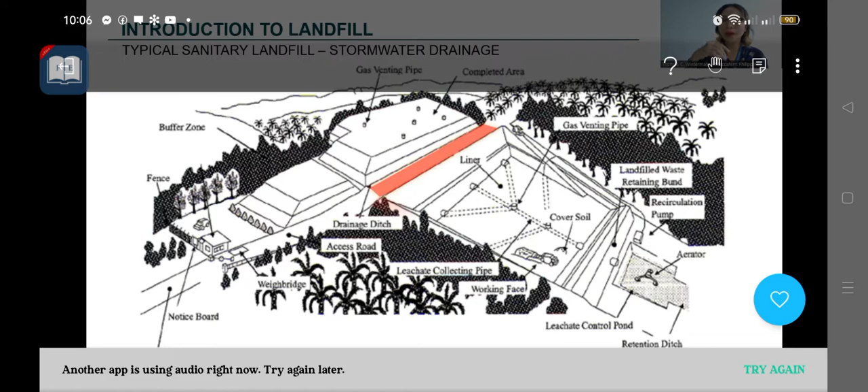Next is the liner facility. Since our waste produces leachate—water extracted from the waste—we don't want that leachate to penetrate our natural soil, because we don't want the natural soil to be contaminated.

That is why one of the most important areas of construction in a sanitary landfill is the liner facility. A liner facility is an impermeable layer in the sanitary landfill that impedes the flow of leachate, so basically your natural soil is protected.

Next is the leachate facility. If you don't want leachate passing through your natural soil, you need an avenue for it to flow through. That is why we have a leachate facility, or pipes, where the leachate will flow. Next is the gas vents.

Gas vents allow the collection of methane gases. We know that waste produces methane gas, and once it is not collected properly, it is inflammable and can cause fire risk. So we have a gas vents facility for proper collection of those methane gases.

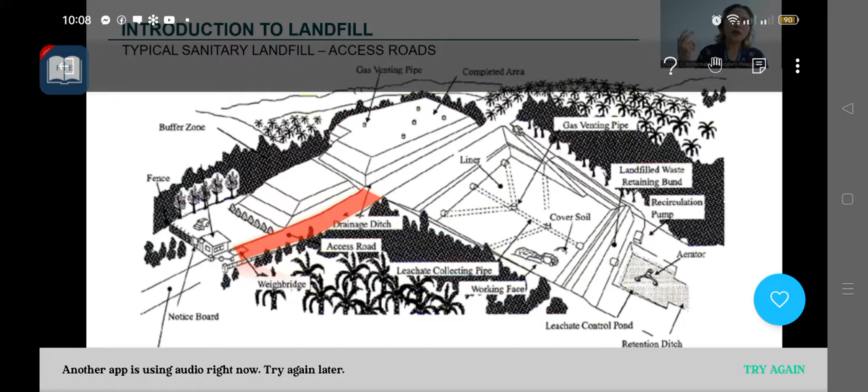Next is access roads. Since our sanitary landfill is usually constructed in an isolated area, there is a tendency that there's no existing access in that area. That is why one consideration in constructing a sanitary landfill is a proper access road, because it is where garbage trucks or dump trucks will pass through.

The last area of construction I will discuss here is the landfill cover. So what is a landfill cover? At the end of every operating day—this is on the operation side of the sanitary landfill—the previous areas of construction were more on the construction side, but this one is for the operation side.

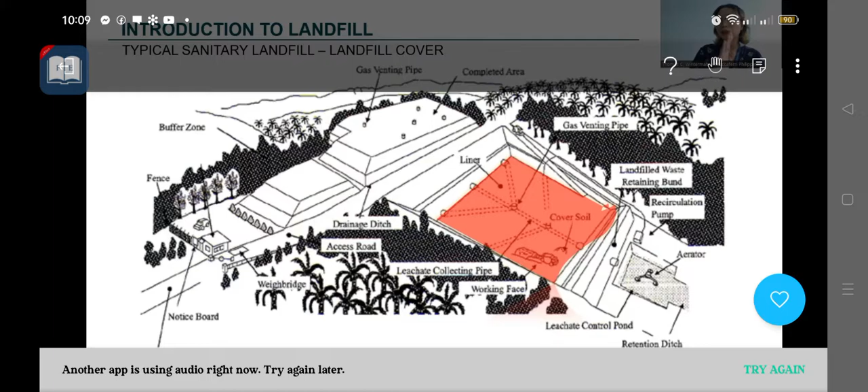Once we have ended the operation of a landfill on a day, it is recommended to put a landfill cover or soil cover for the prevention of odor, to allow animal control, odor control, and erosion control. This is part of the operations in which every end of an operating day, you need to put a soil cover with a minimum thickness, which I will elaborate on later.

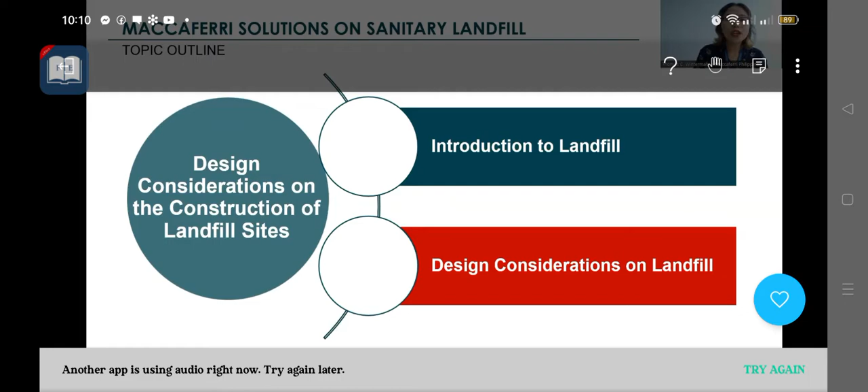Right now I will be discussing the different design considerations on landfill. I have provided a brief introduction on the different areas of construction of sanitary landfill. Now I'd like to dig deeper into these design considerations, and at the same time, what technology can we use or innovate for a faster, more efficient, and cheaper construction. These are the slope, the stormwater drainage, the liner facility, the leachate facility, the gas vents, access roads, and landfill cover.

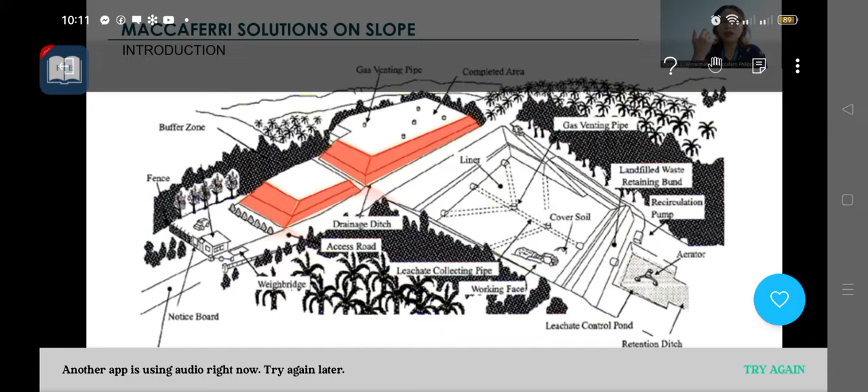Let me start with the technologies or innovations we could incorporate in the sloping area of our sanitary landfill. Our sanitary landfill is always constructed in a sloping condition because if constructed vertically, there is instability of the soil. Typically we need a factor of safety of greater than 1.2 for us to say the slope in our sanitary landfill is safe.

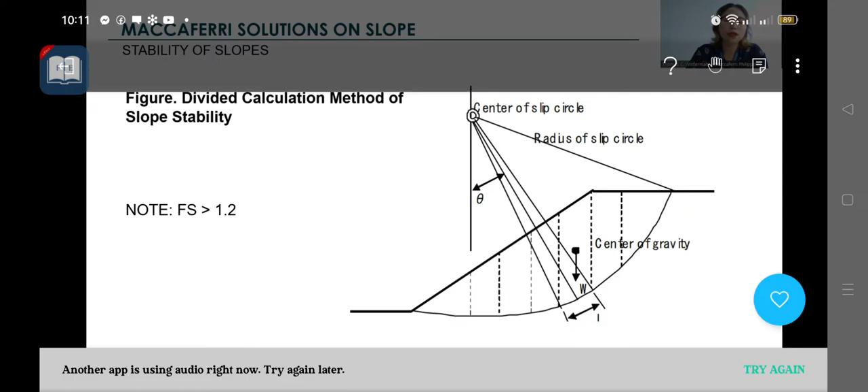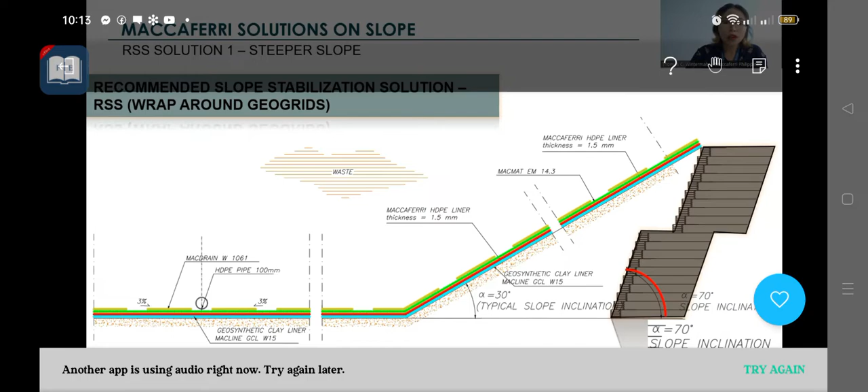So what's in it for us if we construct our sanitary landfill with a steeper slope? I have provided a quick calculation. Imagine constructing a sanitary landfill at a 10-meter depth. I have put here a side-by-side comparison of a landfill constructed at a 30-degree angle and one constructed using a reinforced soil slope with a maximum angle of 70 degrees.

So if we have a 100 linear meter on all sides of the sanitary landfill, we will have an additional volume of 24,400 cubic meters of waste. This means we will be extending the lifespan of our sanitary landfill. For example, if it is constructed to have a lifespan of 1 year, because you have constructed it at a steeper slope, your sanitary landfill will continue to operate up until 1 year and 10 months.

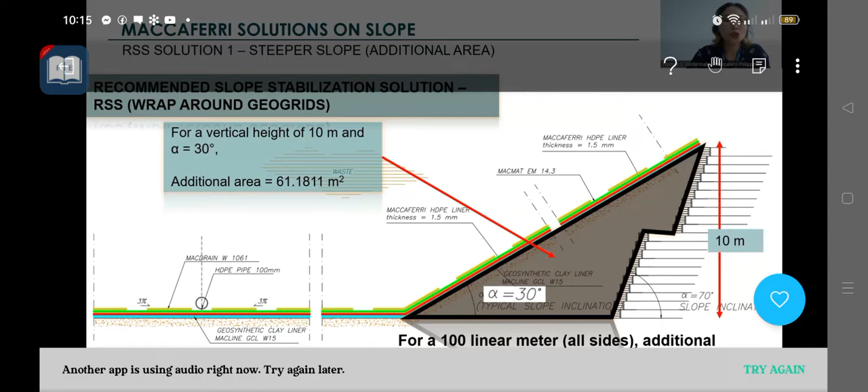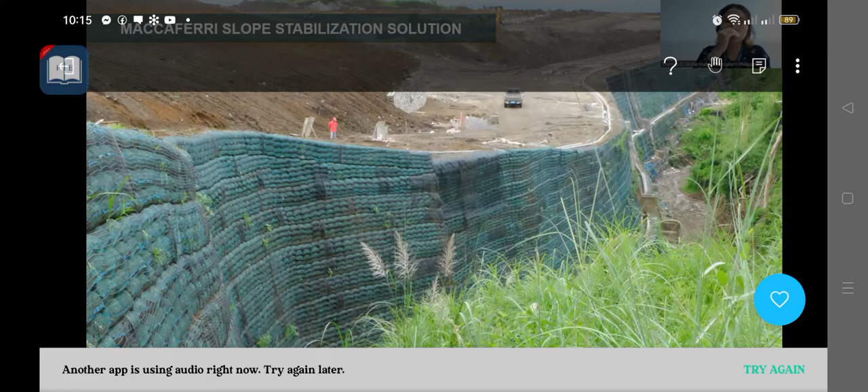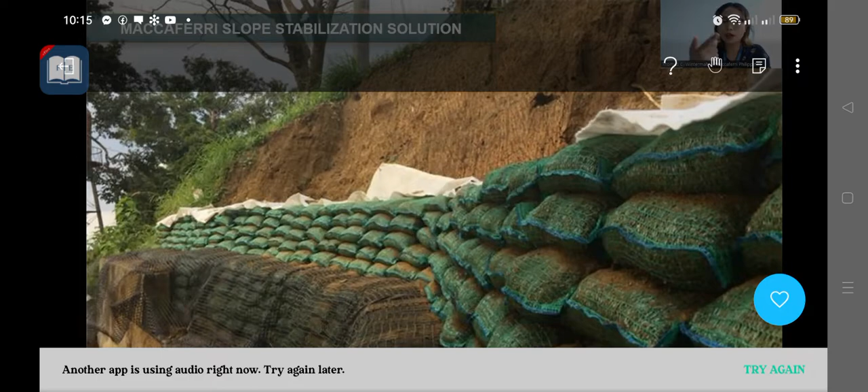Actually, this is how a reinforced soil slope looks like. But take note that this is not a reinforced soil slope in a sanitary landfill. I just would like to show you how a reinforced soil slope looks like. This is from a soil bag filled with soil, and then the geogrids will be wrapped around this soil slope.

This is a close-up look of a reinforced soil slope. Other than being able to be constructed in a steeper angle, another advantage of using reinforced soil slope as a means to construct our sanitary landfill is on the expansion of our sanitary landfill.

What do I mean by that? Because there are times when we're already finished with the first landfill, so we have already filled it. What happens is that we will cover it with soil so that it will be a flat area, and then we will find another area for us to construct our sanitary landfill. So this area is already finished, already full, and then I will go to another area to construct my second sanitary landfill.

One of the advantages of using this reinforced soil slope as a means of construction of your sanitary landfill is that instead of finding another area, you can utilize the space that you had on your previous sanitary landfill and just construct your sanitary landfill vertically. If we already have a finished area here, you can just construct your sanitary landfill vertically by using a reinforced soil embankment.

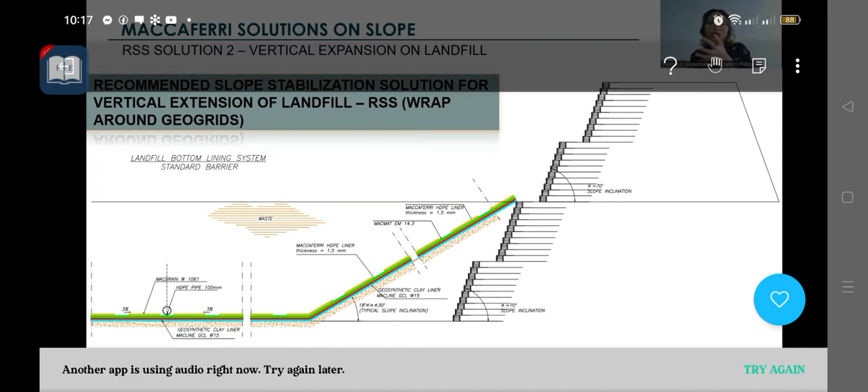Now, for reinforced soil embankment, you just need to construct it on the perimeter of the existing landfill, and then you already have your second landfill. Again, it will allow you to save space, especially since there are some municipalities that don't have that much space to construct another sanitary landfill. So why not construct vertically, expand it vertically? Instead of expanding horizontally, you can expand vertically.

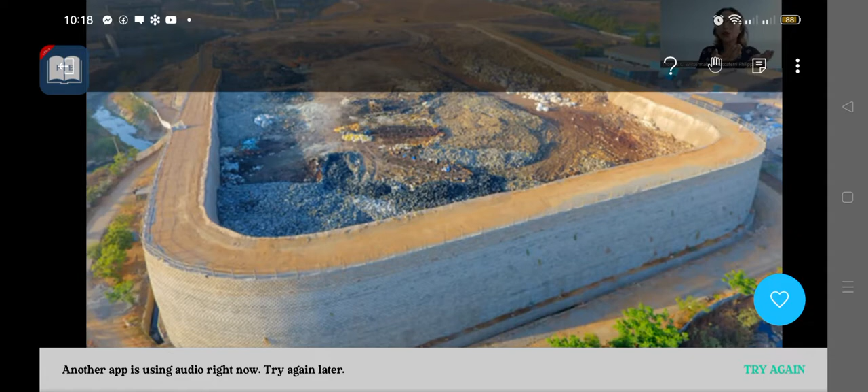So this is actually how it looks like. On your natural ground, you will be constructing a reinforced soil embankment on the perimeter of your land, and it will already serve as your sanitary landfill.

The third advantage of using reinforced soil slope is that in the Philippines, we typically construct our sanitary landfill by digging down on a natural ground, and that excavated area will already serve as our sanitary landfill. What we would like to suggest and innovate is that instead of working downwards, why not work upwards? Instead of digging down or excavating that natural slope, if this is your natural soil, you will dig down for you to have a sanitary landfill.

So what we would like to innovate is that instead of digging down or excavating, why not construct our sanitary landfill above the natural soil, and then just put a reinforced soil embankment on the perimeter of that natural soil. So the comparison is: instead of excavating downwards, we just need to backfill and put a reinforced soil embankment on the perimeter.

It is more cost effective. It will provide us with a faster construction time. It will actually have a lower carbon footprint, and of course, it is more aesthetically beautiful. I will be explaining to you later why it is more aesthetically beautiful.

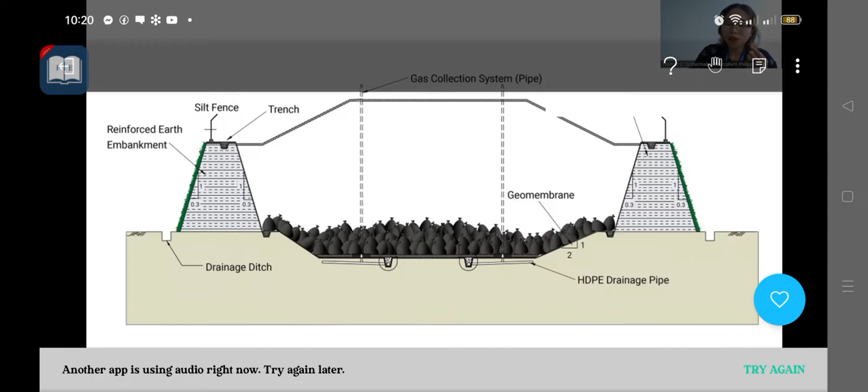So actually, it will look like this. Imagine if you have constructed your sanitary landfill above your natural ground using a reinforced soil embankment, constructed on the perimeter of your natural ground. In time, as you can see, vegetation will thrive, and it is aesthetically beautiful.

It looks like they have a man-made mountain in that area, and it doesn't look like a landfill. It doesn't look like waste is being dumped there, because again, it is aesthetically beautiful. So again, this is how it looks like.

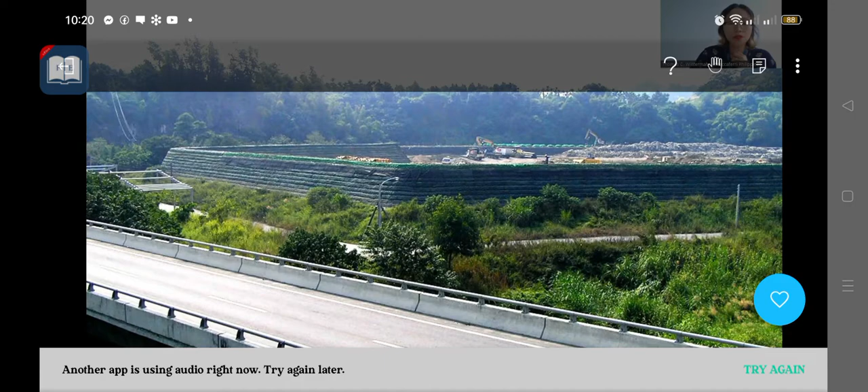This is how a reinforced soil embankment looks like during the construction phase. This is the inside of that reinforced soil embankment. Yeah, this is how it looks like.

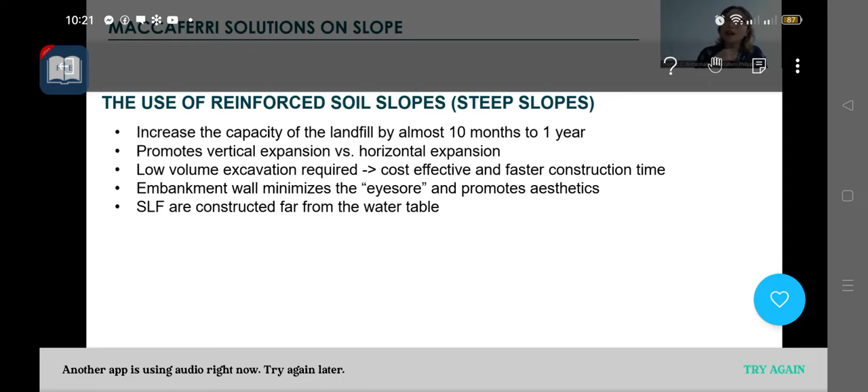Also, if we use reinforced soil embankment, we can allow our sanitary landfill to be far from the water table. There are times when in the middle of digging our sanitary landfill, we have already reached the water table. So when we construct our sanitary landfill vertically or upward, we could prevent or allow ourselves to be far from the water table.

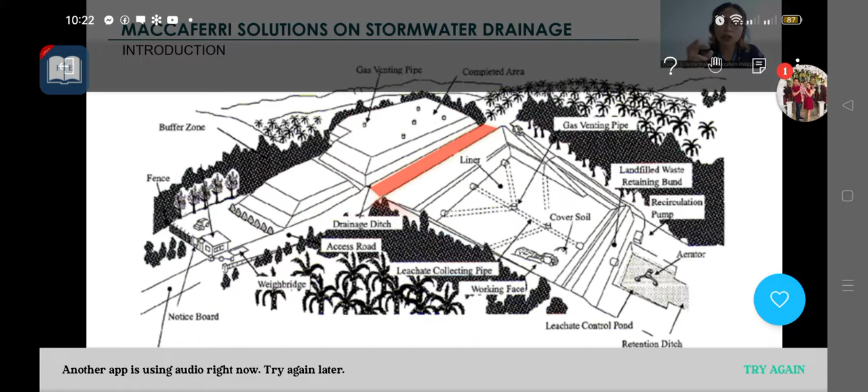So the next area of construction is stormwater drainage. As I mentioned, stormwater drainage is where your rainfall or rainwater will flow. It is constructed on the perimeter of your sanitary landfill, and usually our stormwater drainage is constructed using open channels.

But sometimes when we have a presence of smooth soil, what happens is that when there is rainfall, since our earth canal is constructed at a minimal slope, there will be a fast flow rate in our open channel. That is why some of our open channels need to have a rougher surface for the rainfall to flow in a slower manner.

That is why we would like to address this issue by incorporating technology that gives a rougher surface. The first one is the use of mattresses, which are rocks consolidated or compacted in a wire mesh, placed on the surface of the open channel. Since it is rock, once water flows there will be a slowing down of the flow. This is how it looks like.

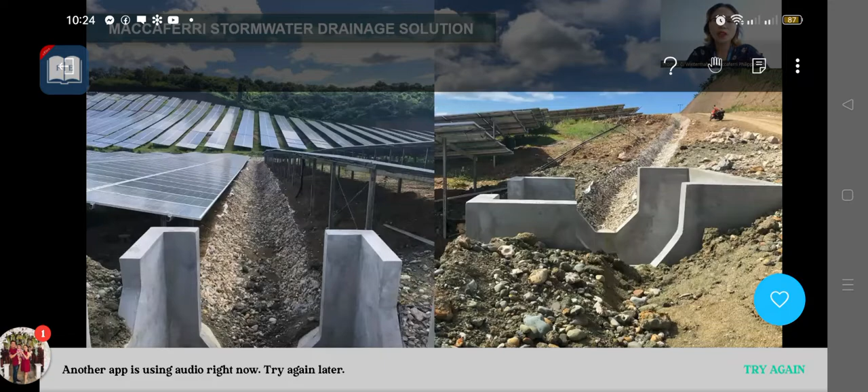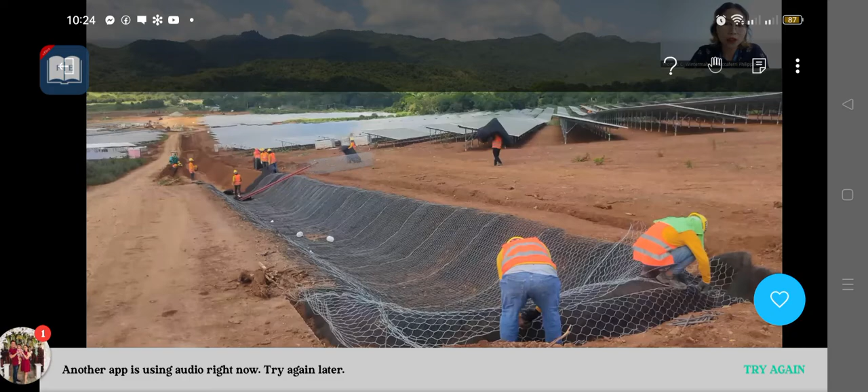The next one is the use of reinforced erosion mat. Our reinforced erosion mat has the same ability as the mattresses, in that it allows the flow of water to be slower than the usual flow rate, but it is thinner than the mattresses. This is how it looks on installation, showing the construction of putting reinforced erosion mat on open channels.

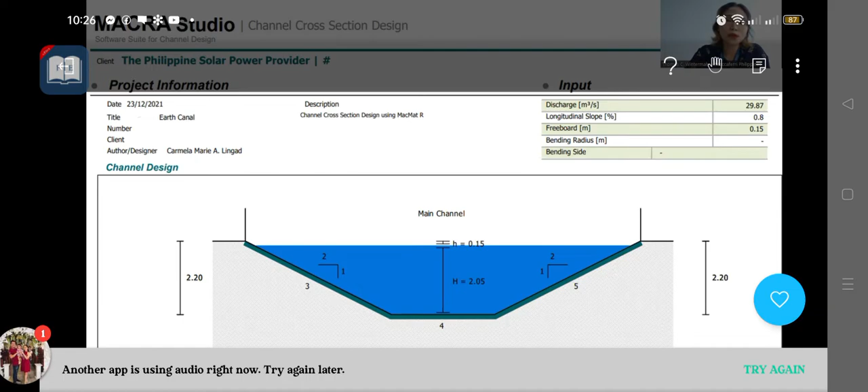The use of alternative material for stormwater drainage is also supported by design calculations. It has huge savings compared to reinforced concrete. If we will not be using earth canals, we can use reinforced concrete, but installing surface liners on our open channel is cheaper compared to using reinforced concrete. Using erosion mat promotes vegetation, and the design life of this will be more than 50 years.

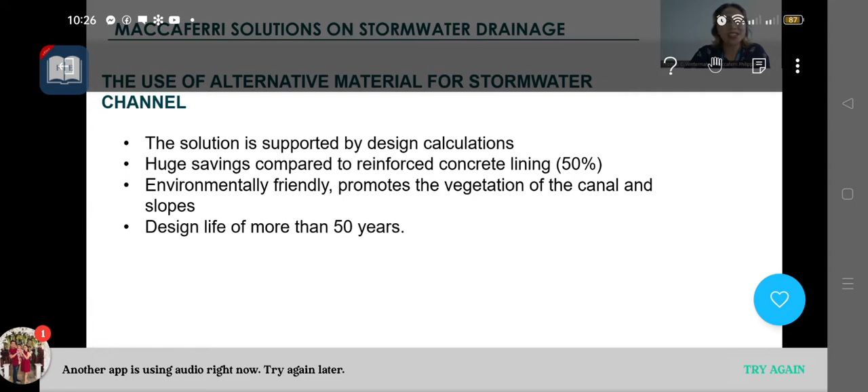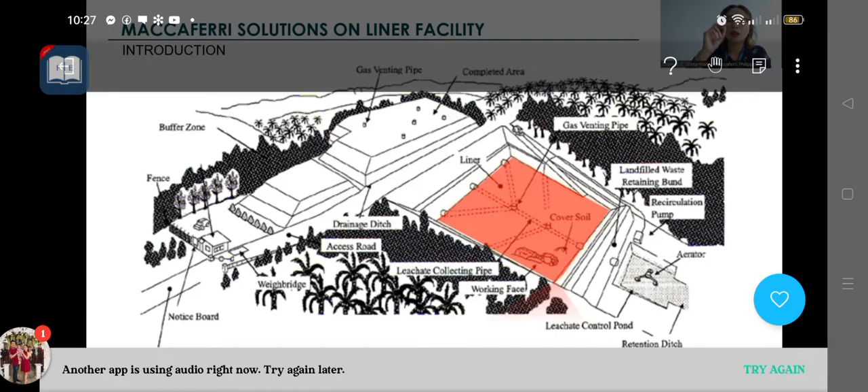The next area of construction is the liner facility. This liner will impede the flow of the wastewater or the leachate. The leachate is the water extracted from the waste or the garbage, and we don't want it to contaminate our natural soil. That is why we need to have an impermeable layer in our sanitary landfill to impede the flow of that leachate.

This is how a typical liner looks like. On the conventional design, it is recommended to have a clay layer and then put an HDPE liner above it. Clay is impermeable once it is compacted. It is recommended to have at least 0.6 meters of clay with a coefficient of permeability of less than 1 times 10 raised to negative 9 meters per second. The lesser the coefficient of permeability, the more impermeable your layer is. So it's recommended to have 0.6 meters of clay plus another layer of HDPE liner, which is also impermeable. That is the recommendation for the liner facility.

But instead of using 0.6 meters of clay, why not incorporate another solution, the use of geosynthetic clay liner? A geosynthetic clay liner is a sandwich of two geotextiles above and below, with a layer of bentonite clay in the middle. So instead of using 0.6 meters of clay with a permeability of 1 times 10 raised to negative 9, why not use this thinner geosynthetic clay liner?

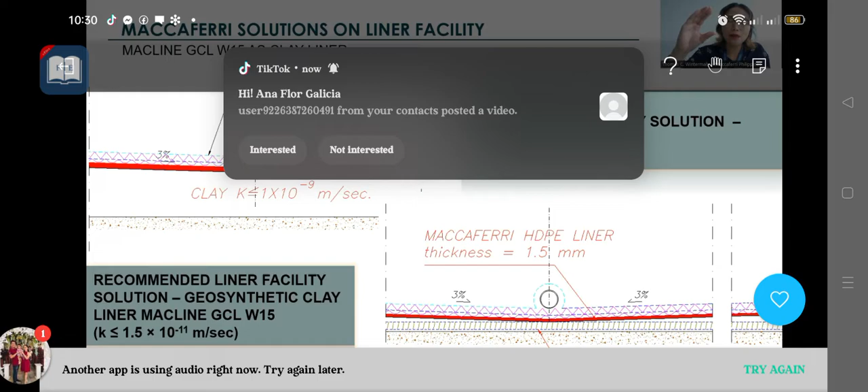What's in it for us? You can lessen the thickness of your sanitary landfill. That 0.6 meter layer of clay can be lessened to less than 1 centimeter of geosynthetic clay liner. The savings from lessening the thickness of your clay will become additional volume of waste that can be disposed on our sanitary landfill. It is more beneficial to extend the lifespan of our sanitary landfill, because we will save space and cost, and allow our sanitary landfill to have a longer life span since we have lessened the thickness of our liner system.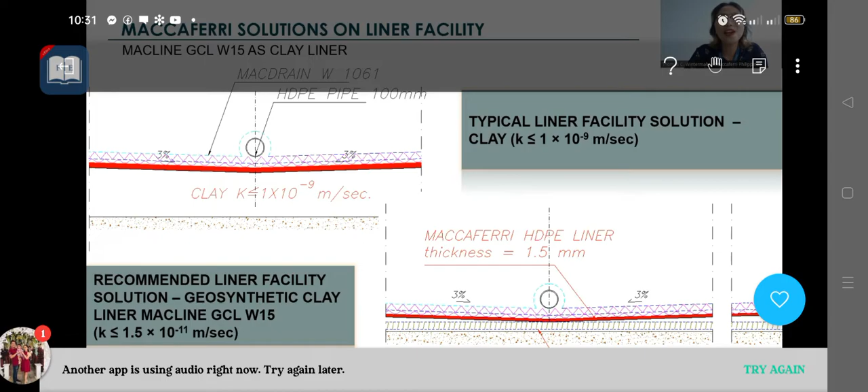This is how it looks like. On the natural ground, we will be putting our geosynthetic clay liner instead of 0.6 meters of clay, and then above it we will put a geomembrane or HDPE liner. Our geosynthetic clay liner has a coefficient of permeability of 1.5 times 10 raised to negative 11. The lesser the coefficient of permeability, the more impermeable your layer is. The only requirement is to have a coefficient of permeability of 1 times 10 raised to negative 9, but our geosynthetic clay liner has 1.5 times 10 raised to negative 11. This is a close-up look of the layering, the GCL or geosynthetic clay liner, and then the HDPE liner.

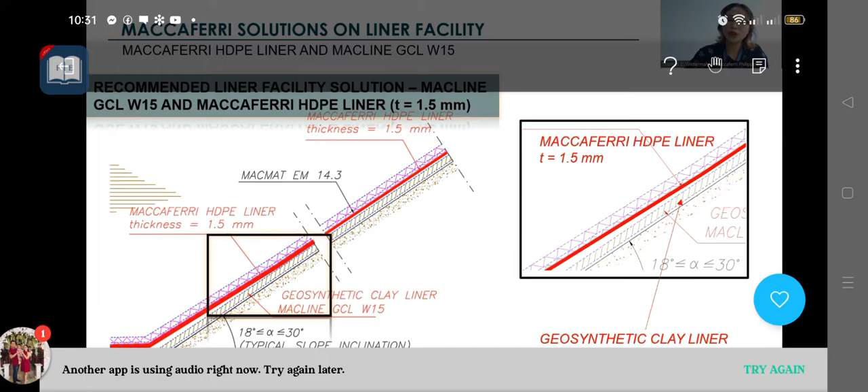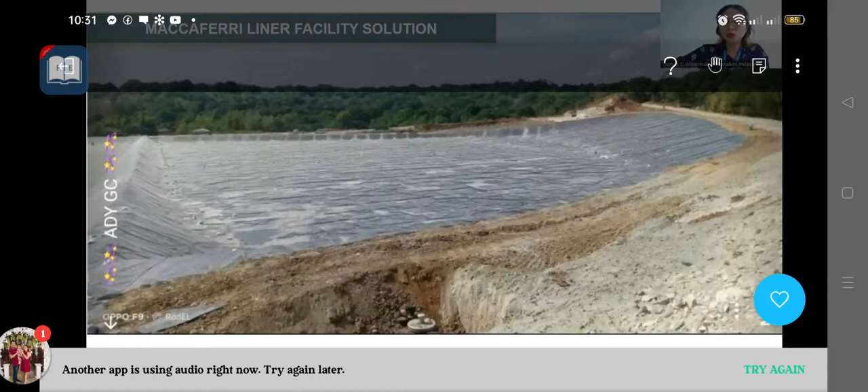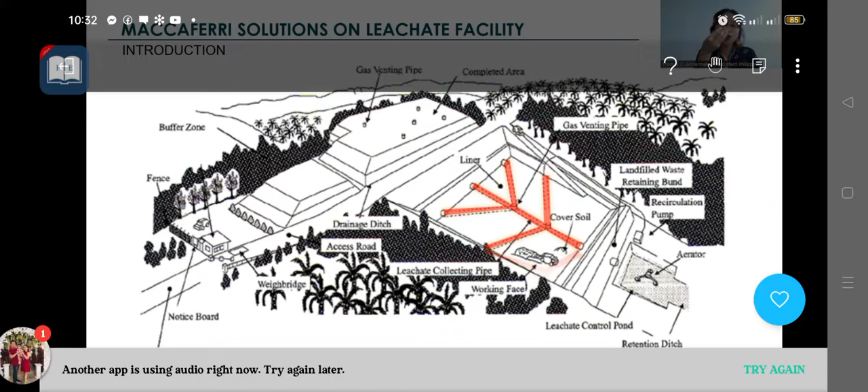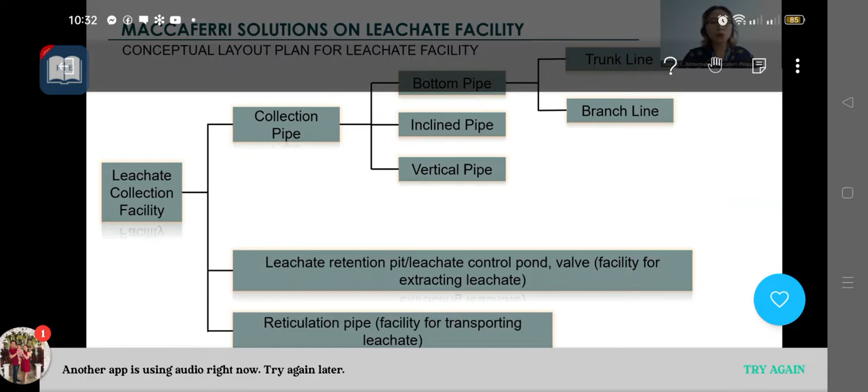In actual practice, this is how a GCL looks like. On the natural ground, you need to install your geosynthetic clay liner, and after that, you need to put your HDPE liner. The next one is the leachate facility, specifically the leachate collection facility, where these pipes are where your leachate, the water extracted from waste, will flow through. What I would like to focus on is the collection pipe. On the collection pipe, we have bottom pipes, inclined pipes, and vertical pipes.

Imagine if that is your sanitary landfill and you dispose waste in there. The water that is being extracted from the waste, once it is compacted—because you will compact the waste once you finish the day's operation—upon compaction there will be an extraction of leachate, and that extracted water will flow through these pipes. These pipes are perforated pipes, meaning they have holes so that the water will pass through. So this is how it looks like.

But of course, you cannot put the waste directly on top of your collection pipe, because you need to put a filter material first. You need to put something in there, maybe gravel or sand, wherein the waste will be filtered out and then the leachate will be collected and will flow through. That is why the filter material is recommended to be gravel or sand, because gravel and sand have voids that allow the flow of water.

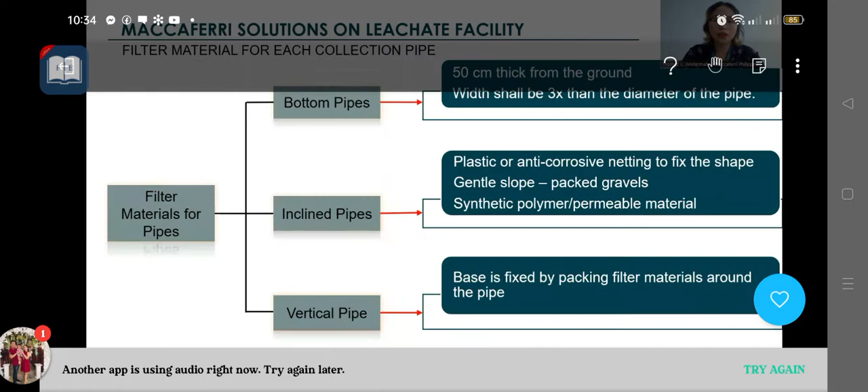So a drainage geocomposite—let me explain. It is a geocomposite, meaning it is composed of two materials: two layers of geotextile with a drainage material in the middle. That drainage material is just like an erosion mat, which you sandwich between two geotextile layers.

What happens is you just need to sandwich your leachate collection pipe within that drainage geocomposite, and the geotextile will already serve as the filter material for your waste. Because geotextile has opening sizes that allow the flow of water, your leachate will be collected, pass through the geotextile, travel through the drainage material in the middle, and then flow into the leachate collection pipe.

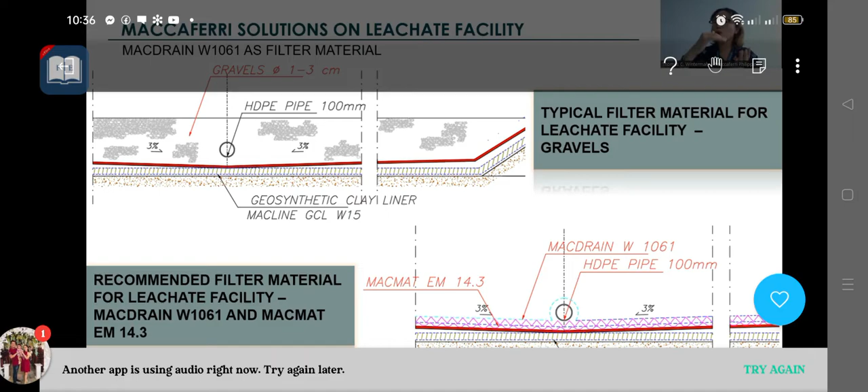So basically, instead of sandwiching your leachate collection pipe in gravel, you can just sandwich your pipe in a drainage geocomposite. What's in it for us? We can lessen the thickness of our system—instead of having a thick gravel filter material for leachate, we can reduce that thickness by using drainage geocomposite. This also allows our sanitary landfill to have a longer lifespan, so we can dispose of more waste in it.

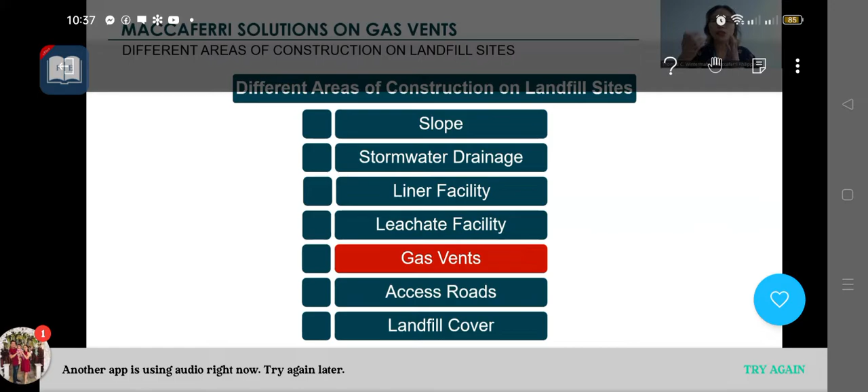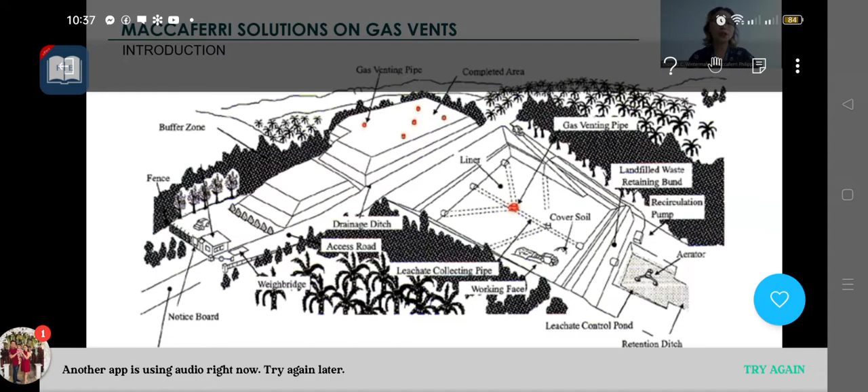Next is gas vents. As I explained earlier, this is a facility that collects methane gases so they are not released into the environment, because methane gas is flammable. Our waste produces methane gases, and once they are not collected properly, it can promote fire, because it is flammable.

The usual or conventional design for our gas vents is the use of gabions. On the slope of our landfill, we need to install gabions. A gabion is just like boulders or rocks put in a wire mesh, placed on the surface of our sanitary landfill. Because it is composed of rocks or boulders, it has voids, and those voids allow the flow of your methane gases.

It allows the flow of your methane gases, and that gabion will already serve as your gas venting facility. And it will be collected.

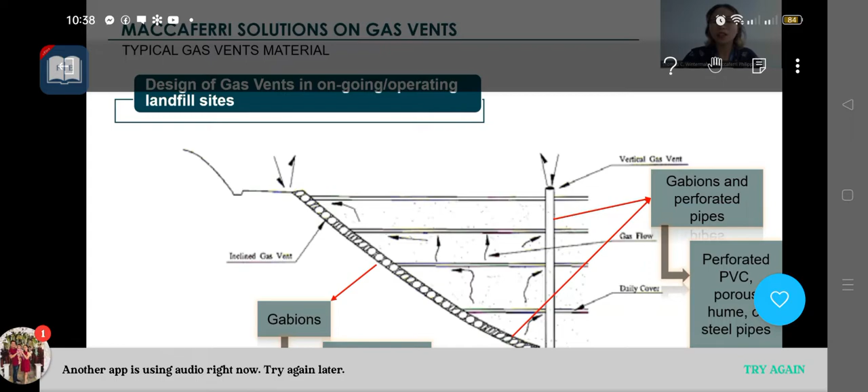What we could do is that instead of using gabion, why not use a combination of our drainage geocomposite and a filled drainage material, or our erosion mat. Our erosion mat is also the material that is sandwiched in the drainage geocomposite, so it will also serve as our drainage material. We just need to put it on top, and then it will already serve as our gas venting facility. What will happen is that we can lessen the thickness of our system.

Instead of using a gabion having a 300 to 500 millimeter thickness, we can just lessen it by using drainage geocomposite and erosion mat. Next, for the access roads.

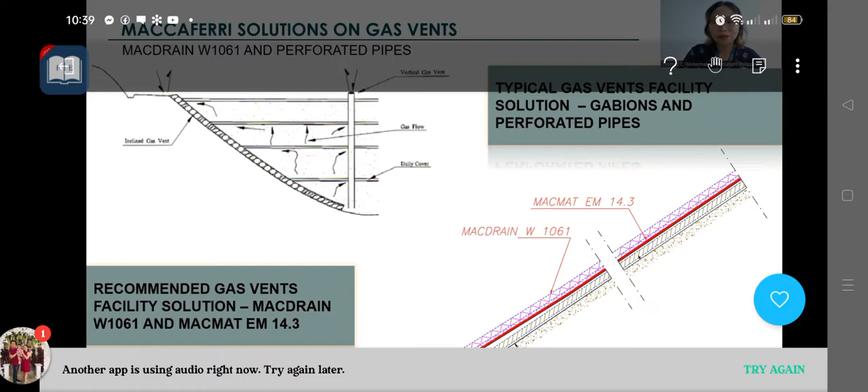Access roads allow the flow or traveling of the trucks. And of course, you would like to have a good access road because it will carry tons and tons of waste every day. So the solution for our access roads actually depends on where your sanitary landfill is located.

We do have different solutions on access roads. Since our sanitary landfill is constructed below, our access road should have a higher elevation compared to the sanitary landfill. Because if you have a higher elevation of your road, a truck that passes through that road just needs to dump all of the waste onto your sanitary landfill.

That is why on our sanitary landfill, the usual access road that is constructed is a road embankment. On the road embankment, if you would want to steepen the slope, you can use a reinforced soil slope, or mechanically stabilized earth wall. And if you would like to construct your access road using asphalt,

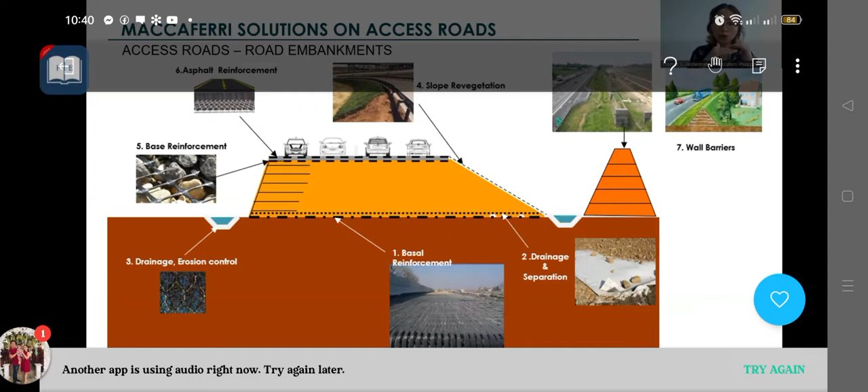We could also have an asphalt reinforcement using fiberglass geogrids. Also, in our embankment, for us to be able to reinforce our soil underneath, we can put basal reinforcement.

If your sanitary landfill is situated in a mountainous area, there's a possibility of rockfall. We could protect our access roads by installing rockfall barriers. We could use drapery systems, soil nailings, or rockfall embankments. So there are many solutions.

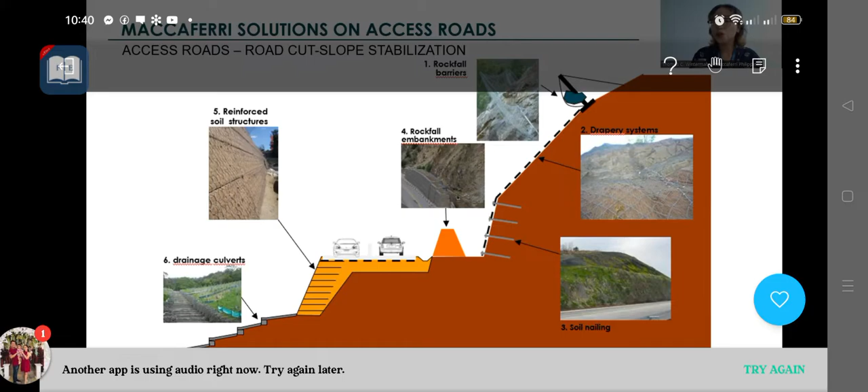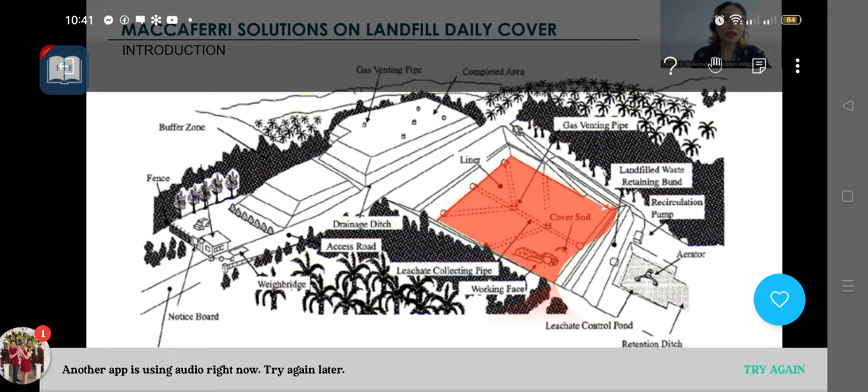And the last one is the landfill cover. This landfill cover is on the operation side of the sanitary landfill. At the end of every operating day of a sanitary landfill, there is a requirement to put a soil cover over the whole waste to prevent animal issues, control odor, and control erosion.

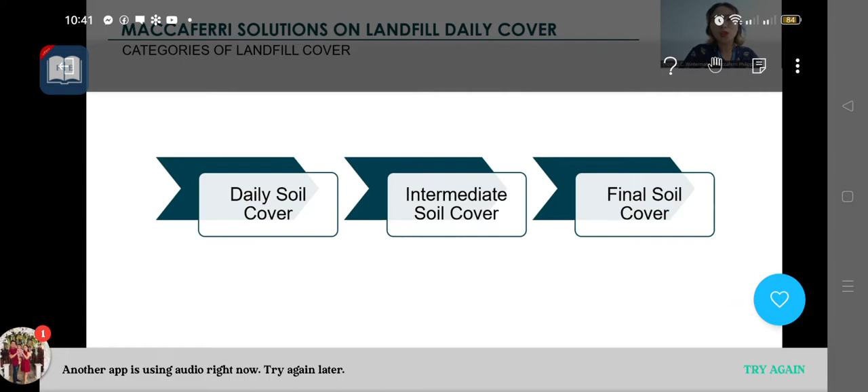We do have different landfill covers: daily soil cover, intermediate soil cover, and final soil cover. But I would like to focus on daily soil cover. It is required to have at least 6 inches thick of daily soil cover at the end of each workday.

So what does this mean? If I have put waste on the sanitary landfill and finished operations for that day, after putting the waste I need to have 6 inches of soil cover. The next day, I will put waste again, and after that day I need to put another 6 inches of soil cover. So on a day-to-day basis, you are putting 6 inches of soil cover, and this eats up space in your sanitary landfill.

That is why we recommend, instead of using soil as a cover for your waste, to use an alternative daily cover. So we would like to introduce another innovation, the use of alternative daily cover. For the discussion of the alternative daily cover, I would like to turn over this presentation to my colleague, Engineer Carlos Xavier Isip, our Technical Business Development Engineer for Erosion Control. Thank you.

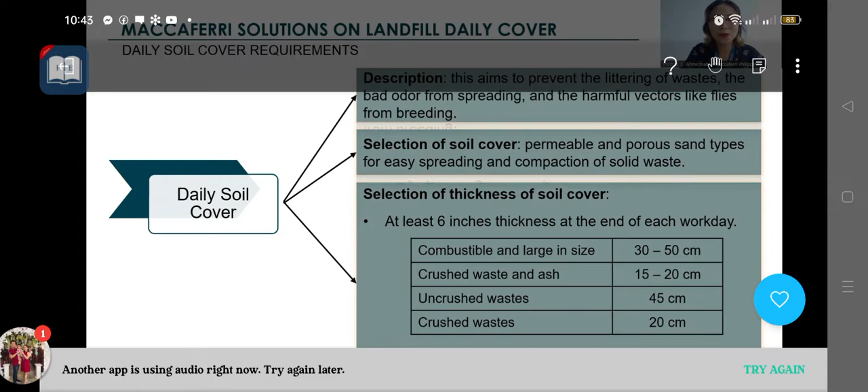Thank you, Engineer Carmela. I'll be continuing this portion of the webinar with a focus on landfill covers. Landfill covers are generally intended to minimize the impact of the landfill on its surroundings. Specifically, we want to control animals, odor, dust, and erosion. In the next few slides, we'll be showing the common types of landfill covers.

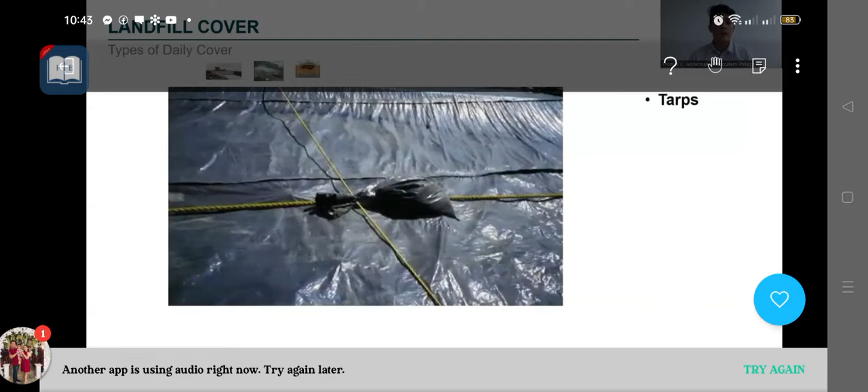One of the first materials that comes to mind is tarps. Now you also have geotextiles. With both tarps and geotextiles, they need to be dragged over the landfill when installing, and oftentimes these need to be removed when the landfill is ready to accept new solid waste, then placed again at the top at the end of the workday.

Now we can also use spray-on covers. What we do here is typically mix our base material with water and spray it using a hydroseeding machine on top of the landfill. This is supposed to harden into a protective shell covering the landfill.

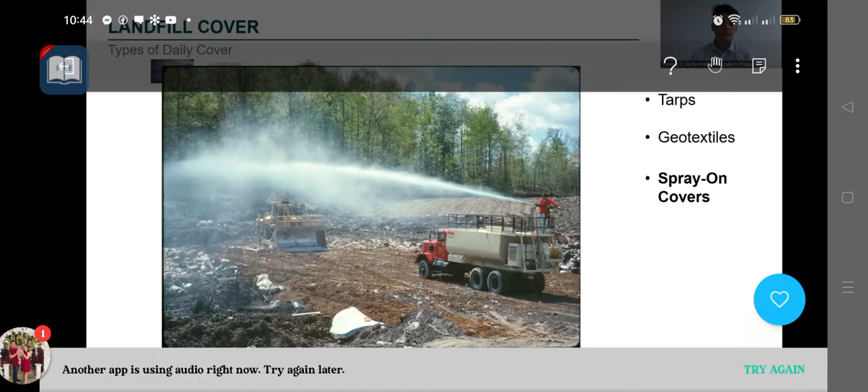Lastly, we have our most common type of daily cover, which is the soil cover. This is usually soil in the form of clay that is transported onto the landfill using trucks and then compacted on the surface to decrease the permeability of the covering layer.

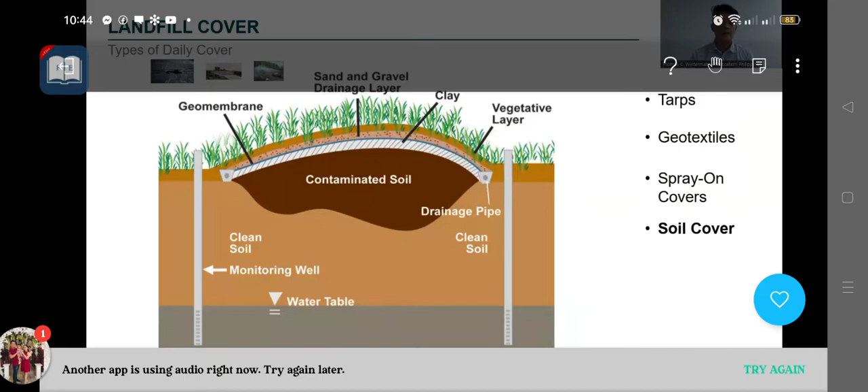Now, top coat ADC, or alternative daily cover, is a type of spray-on cover which aims to control odor, disease, vectors, scavenging, and erosion. Because it is a type of spray-on cover, it does not need to be applied at the requirement of 6 inches as opposed to using the soil cover. So by using an ADC, which is applied very thinly, we can save at least 20% of the landfill space and eventually extend the design life of our landfill.

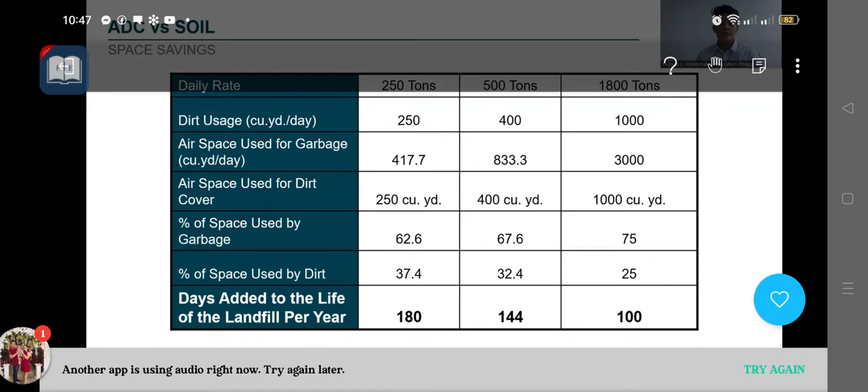Now this will translate not only into space savings, but also into extending the design life of your landfill. This table shows just how much space savings an ADC gives your landfill in terms of number of days added to the design life. A typical landfill with 250 tonnage capacity will add 180 days to the capacity of the landfill per year of usage when we replace the soil cover with ADC.

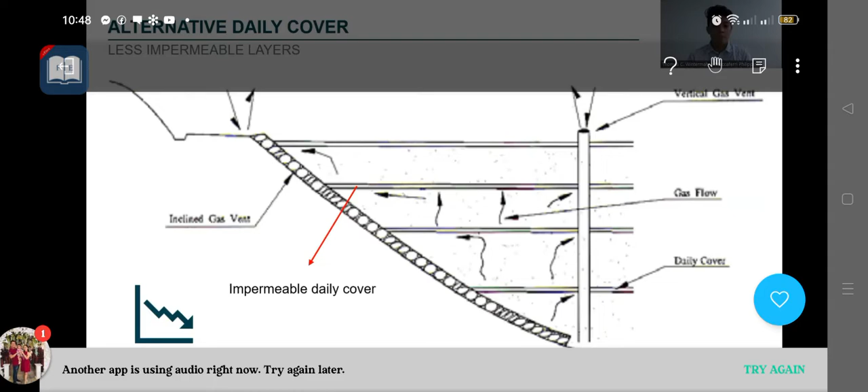If we use an ADC that is biodegradable, we are limiting the number of impermeable daily covers. Because an ADC is biodegradable, it will not hinder the flow of gas inside the landfill because it degrades alongside the trash. This will result in more efficient and higher quality methane gas collection and leachate management.

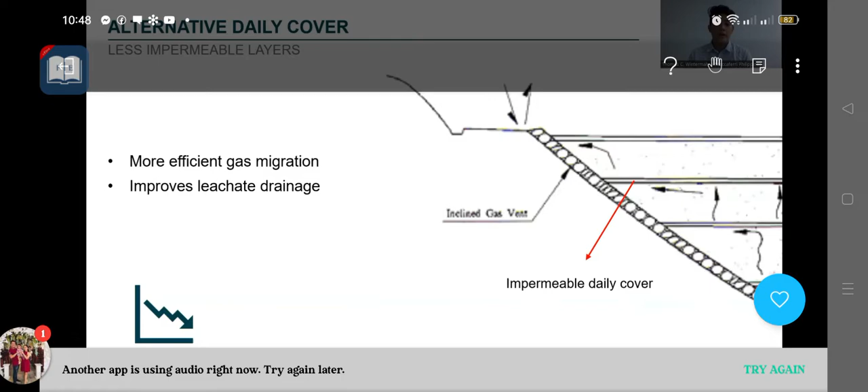So the last key benefit is that it is very easy to apply. There's no need to walk over and drag the material over the working face, and no need to remove the material for the next day of trash collection. It also has a dark green color, which makes spotting very easy. And because of its versatility, it can be sprayed using just 2 operators for the whole operation. So we are actually saving time and money by applying this product.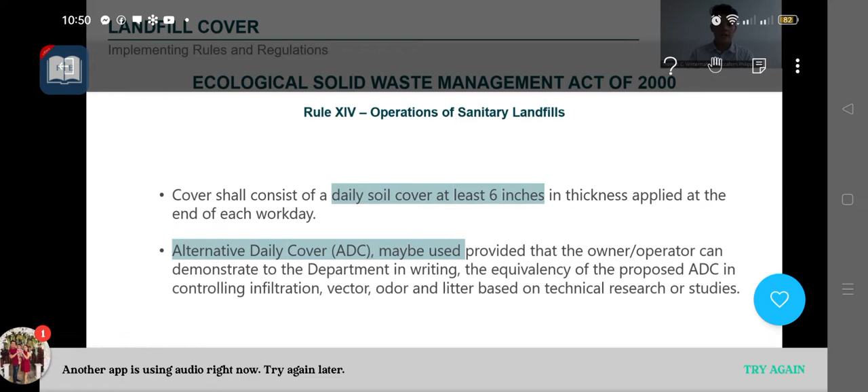The IRR also states that we have to have an additional interim soil cover if the landfill will not be used for a long time, and also the installation of a final cover at the end of the design life of the landfill. I'd like to cite a US EPA study investigating the use of ADC in sanitary landfills, specifically document EPA 600 SR 93 172.

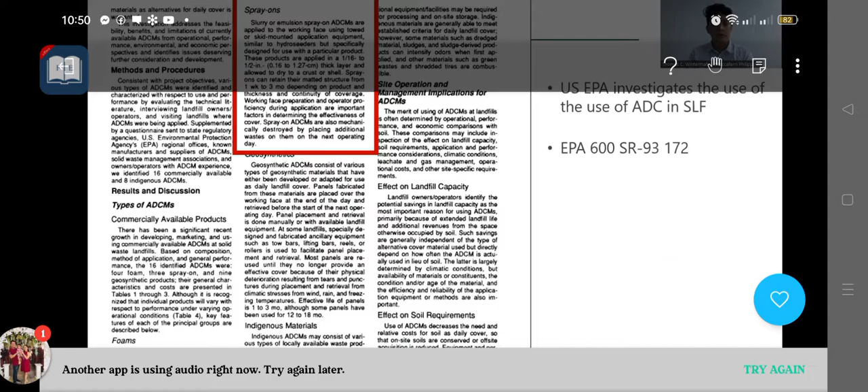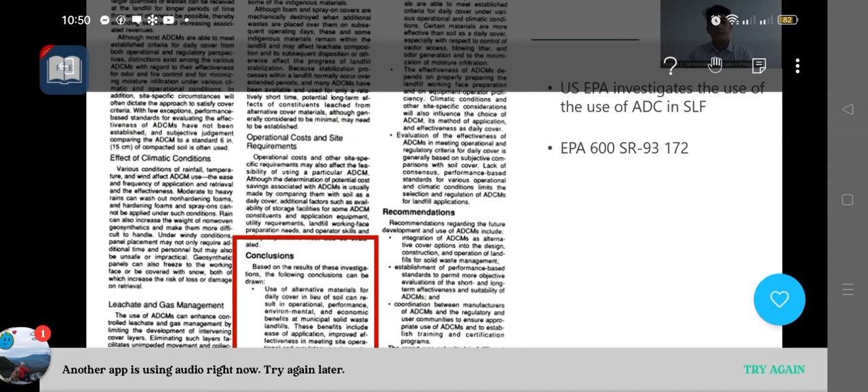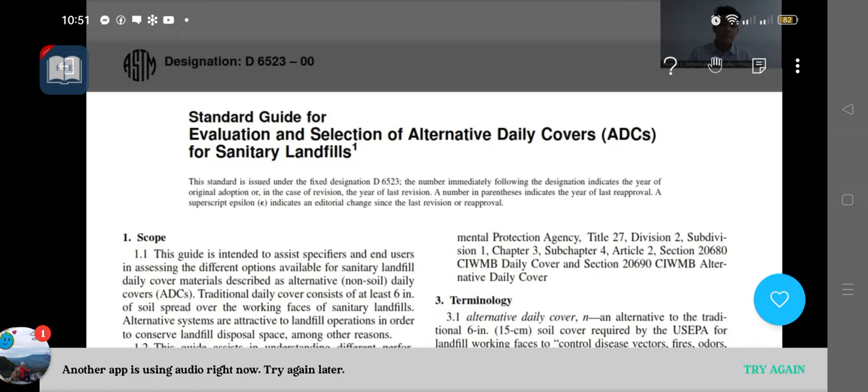Let's look at this highlighted section on spray-on ADCs. The conclusions of the study found that ADCs introduce significant cost savings, improve effectiveness in meeting site operational and regulatory requirements, and allow more effective management of leachate and gases. Let's also look at ASTM D6523, the standard guide for the evaluation and selection of alternative daily covers for sanitary landfills, one of the main guidelines considered when selecting an ADC.

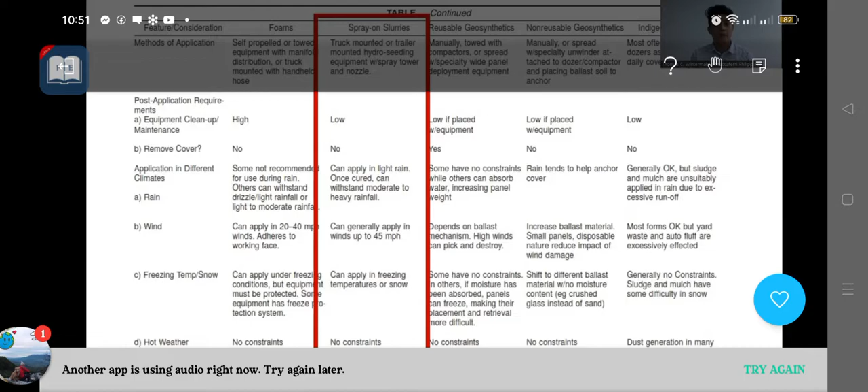Here are the parameters we are looking at. There should be no need for removal of the ADC between waste reception. It should be able to withstand moderate to heavy rainfall and resist winds of up to 45 miles per hour, or 72 kilometers per hour. It should not interfere with leachate and gas migration, while also being able to shed away infiltrating rainwater.

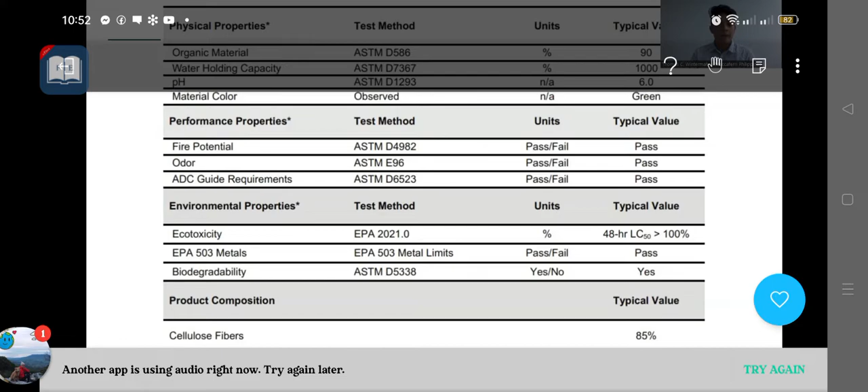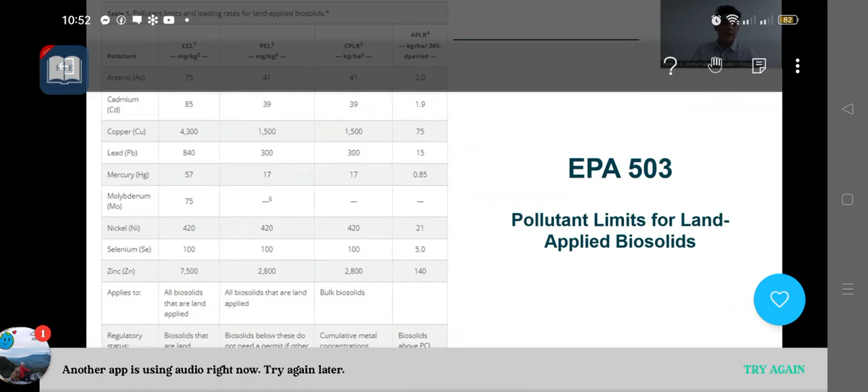Aside from ASTM D6523, here is a summary of other performance and environmental properties an ADC should be able to comply with. With regards to environmental compatibility, our ADC topcoat also passes the EPA 503 biosolid limits. Here is what the EPA 503 looks like, with the environmental parameters and thresholds an ADC should be able to comply with.